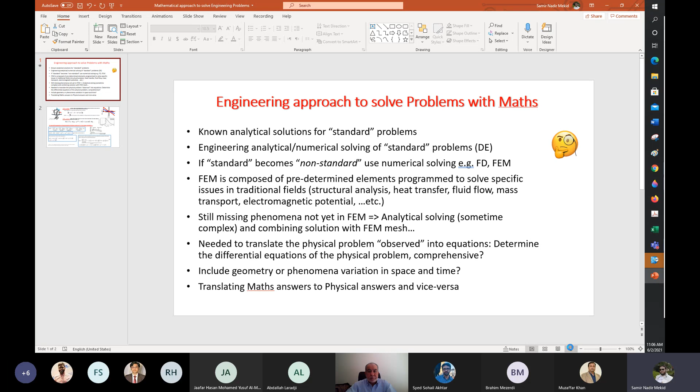I hope you can see the slides, yes? Yeah, we do.

I spent a little time to find out how I can communicate with math professors coming from an engineering background. As you look at the title, it says engineering approach to problem solving with math. That's the purpose of the meeting. I wanted to develop a language that can be understood by both sides, so we can communicate. So I'm not expecting to see any results in the first or second meeting, but probably later.

The way we solve our mechanical engineering problems is initially assuming that I have a beam with a length and a square cross section, and I am applying a force at the end of the beam, and it's bending, or in the middle supported by both sides, and therefore we have the solution of the bending. This is what we call a standard problem with known analytical solutions. These are the basic solutions to basic problems.

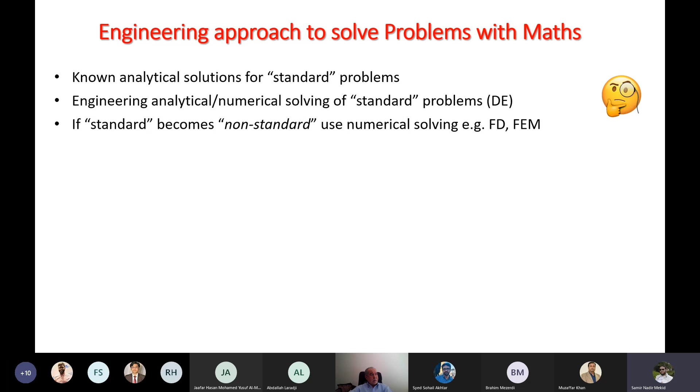Finite element is maybe the first or second course taught to mechanical engineers. It is a library of elements that have been programmed separately to solve specific issues in traditional fields, and these are almost comprehensive. It covers structural analysis, deformation, stress analysis, vibration, heat transfer, fluid flow, mass transport, electromagnetic potential, etc. So the range of physical problems is large, but the library is not comprehensive. A specific number of problems have been programmed into those elements to be able to solve a problem.

So it happens that there are issues we find out when we try to come up with a new process, when we design something, when we try to be a little more innovative, combining physical problems together, heat transfer with vibration, for example. Then at the interfaces, we might discover other phenomena that have not been taken into consideration, and therefore the FEM becomes incomplete.

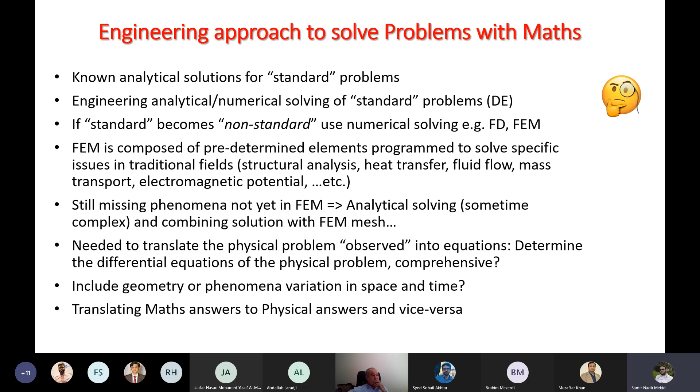That's why math is becoming, I think, very interesting to engineering. Of course, math can still do research, develop, and fly on its own, and engineering can also do research and fly on its own. But I think they can fly much better if they combine skills. I see that math is very important to engineering.

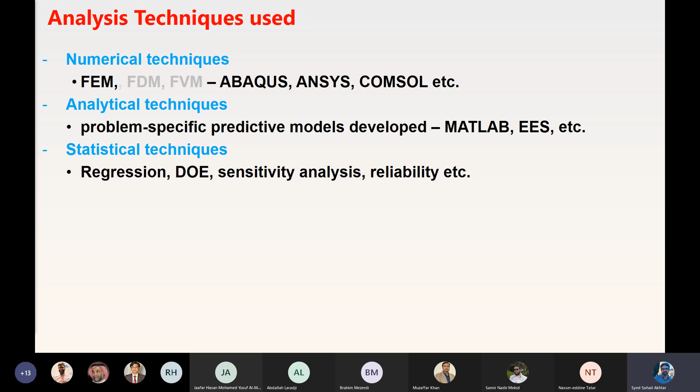So as already discussed, what is finite element? Of course for us, finite element method is the most common one, where we capture the deformation behavior and capture the stresses during deformation. For example, if a manufacturing process involves deformation, a process can involve thermal fields like welding or machining, or coupled with structural problems, fluid flows, and we can have coupled problems like solids and fluids and so on.

Of course, our approach is a bit different from mathematics, I mean like the department mostly. As Professor Mekid explained, mostly we are dealing with complex problems. The physical problem is complex. Most engineering problems are complex in nature, and most of the time we cannot get the exact solution for that particular problem. So we have a numerical approach where we approximate our solution by discretizing the problem into small elements.

For example, for a structural problem, the stiffness matrix is solved for each element, and we get the global stiffness matrix after solving the whole problem. So the scenario is simple - how we solve our problem.

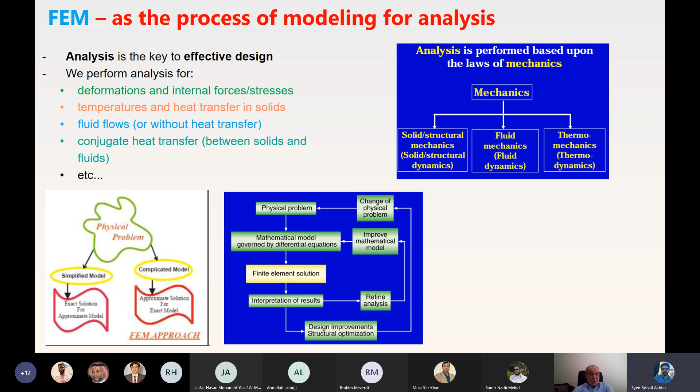Of course, we always encounter errors when we solve the problem, so we have to refine the analysis by improving the mathematical modeling, and also we change the physics of the problem, for example the boundary conditions and so on. So we usually optimize our problem by an iterative kind of approach, but mostly we are going to validate our solutions with experimental data.

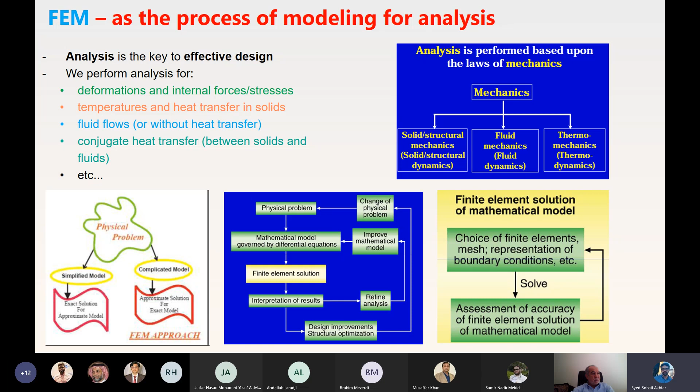So this is probably the main interesting thing with us - we always try to validate our results by having some experimental data. We're not going into much detail, just to give you some glimpses of the real manufacturing processes or some structural applications. In mechanical engineering, for example, we always deal with complex problems.

You can see a few examples, like crushing analysis or fluid flow through channels, or implants under loading in the human body, and so on. So when we solve our problem, we always go from simple assumptions to the more complex situation, and our purpose is to capture the real natural phenomena of the problem.

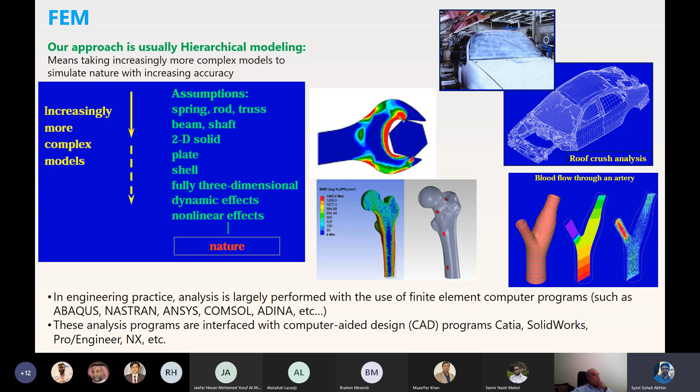Mostly engineering problems are non-linear in nature, of course, as you know. So we have to capture the non-linearity. Just to give you some practical examples or fields which we can apply finite element analysis to, and what the expected outcomes or outputs in our analysis are.

For example, if you are dealing with static analysis, mostly we are dealing with deflection, stresses, strains, forces, energies. If it is a dynamic analysis, we are going to capture the frequencies and the modal analysis, like mode shapes, for example, and so on.

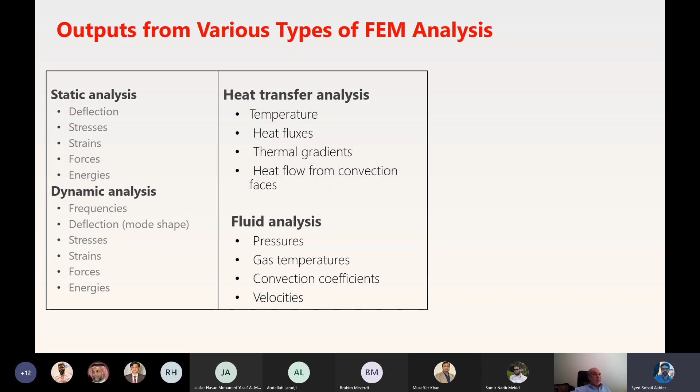If it's a heat transfer analysis, we are interested in the temperature gradients, for example heat fluxes, and so on. If it's a fluid problem, we have to look at pressures and other things. In fact, no single problem has only a single phenomenon in engineering - mostly we are dealing with multi-physics problems.

For example, some simple problems usually mathematicians deal with are only structural problems, where they talk about stress analysis, buckling, or vibration. If it is non-structural, for example thermal or fluid, we can solve them separately. But in fact, in real manufacturing and applications, as the center is focused on, it's the multi-physics problems.

We are having a combination of different physics, like thermal-structural problems or fluid-structural problems, and so on. The manufacturing process is going to have mostly all the phenomena, even the thermal, the phase change phenomena, the structural, even diffusion.

I will go into a little more detail after a couple of slides, but just to give you some idea of what is non-linearity in our problems. Mostly, if you look at the sources of non-linearity, the mathematicians would be more interested in the non-linearities. For structural problems, when we talk about stress and strains, we talk about the constitutive equations. In a structure, we have the body forces, the traction forces, where the equilibrium equations play their role.

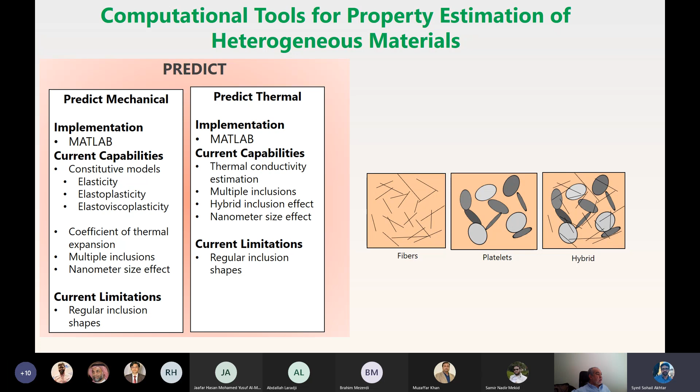Our team used analytical approaches to build codes to predict properties. These properties are based on well-established and extended equations. For example, for thermal properties we used Maxwell equations, then modified those fundamental equations to bring more innovations, capturing effects like particle size in composites, interface resistance, shape, and aspect ratio. We don't have time to get into those details.

Those interested in the analytical studies of property prediction for heterogeneous materials can visit these papers, some of which we recently published. This is one of the latest papers on a new differential scheme for polymer composites, which can deal with non-dilute filler concentration. Most fundamental equations available to capture thermal conductivity of composites are based on dilute concentration, but we modified those models for non-dilute concentration. This is the most important achievement by our group so far.

This is just the last slide, if you allow me Professor Tatar, just to give you a complete picture of what we are doing here, from manufacturing point of view and analytical tools. For example, our product is the cutting tool, which is used in machining applications.

We usually use tools to cut a certain product by machine, but the tool itself is an important component in this manufacturing process. So we have used three approaches for how to design the material. For example, it's a composite material, heterogeneous material, so we can design our material first, getting optimum tailored properties using our built predictive models.

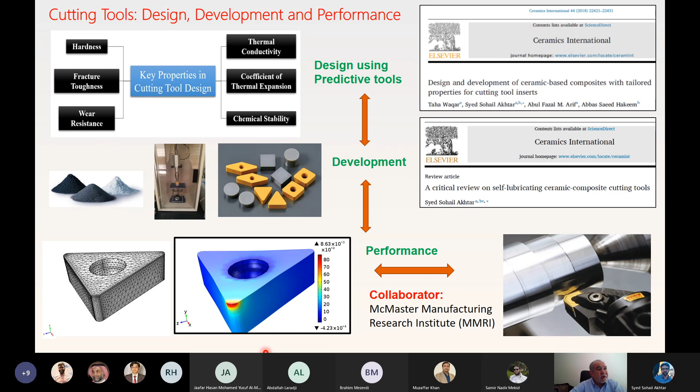By the way, we have Dr. Ahmed Bonfoh, who's an expert in Cahn-Hilliard equations, since you are interested in Dr. Syed. Dr. Ahmed, can you say something about Cahn-Hilliard equations? Ahmed Bonfoh?

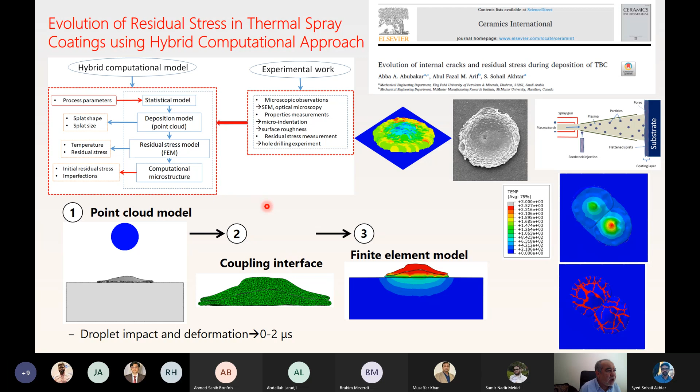Yes, Assalamu alaikum. This is one of the most used equations in the work of Dr. Akhtar, I think. Yes, of course, I have been working on this model, the Cahn-Hilliard equation, with many applications. Even nowadays we have many more applications like tumor growth. There are many other applications of this equation, but especially in material science - phase change, separation of phase, etc.

Yes, I have been working on this equation for some time already. So we will see what we can do together, we'll discuss later. Dr. Ahmed is working rather on well-posedness and existence of attractors and descriptions of attractors, I think.

Yes, the solutions. So we try first to prove theoretical accurate solutions, theoretical solutions. Then there are many applications, simulations of this using finite elements, etc. But mostly I'm expert in proving the well-posedness. I'm not a numerician, but more on the theoretical side - the well-posedness, the properties of the solutions, the long time behavior of the solutions, all these things. But together we can work with numericians, they can do simulations, etc.

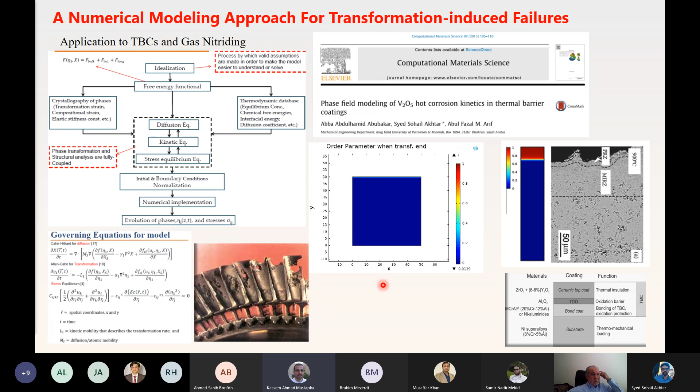It is very interesting. I just want to ask about finite elements. Did you choose finite element because of existing softwares, and because of its convenience in applying it on complex geometries? I think engineers always raise concerns about the conservativity property of finite elements, it's not a conservative method. For this reason, many engineers in industry choose to work on finite differences and finite volume methods because they are conservative. Also, in nonlinear materials you may need to deal with high order finite elements to capture the details of nonlinearity, and you need to work on a very fine mesh. Thank you so much.

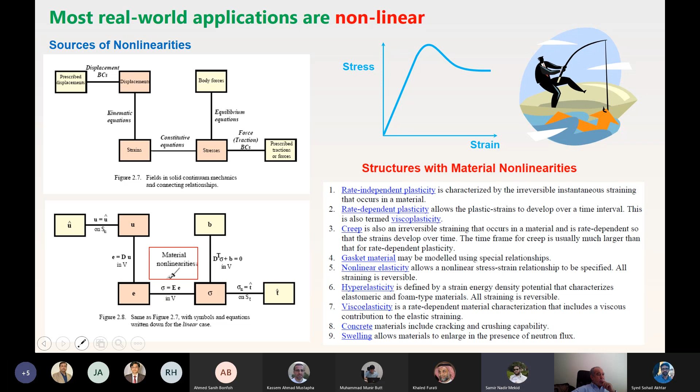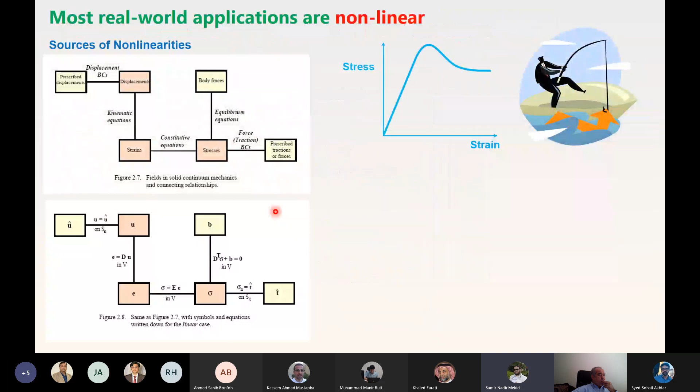One of the applications we have in our plan is to work on haptic tools. For example, you have a cutting tool in a CNC machine, and you have a part, but you don't know the material or the composition of that material, and hence you don't know what process parameters should be defined to go ahead with the machining. That haptic tool, an intelligent tool, will touch the part initially, do a first surface cut, and from that data determine the mechanical properties, and therefore immediately define the parametric process to be used. That's one of the applications.

The second application in our portfolio is related to the stability of any mechanical structure. We've been discussing this for the last 3 months. For example, you have a robot that should stand in an equilibrium position, and if there is any perturbation from whatever source, it should be able to come back to its stability position. Therefore there must be machine learning from those behaviors to know where to come back, because you cannot program everything in a robot. So those algorithms, based on data or sometimes large data, are of great importance.